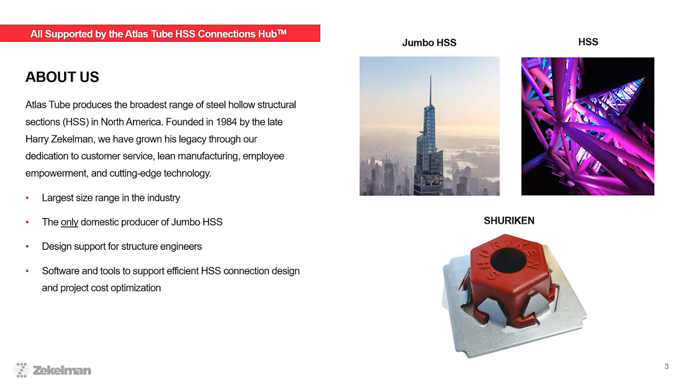We're very proud that we are a domestic manufacturer. All of these jumbo sizes and the other material we provide are all produced here in the US. Or for those joining from Canada, we do have one plant in Canada. So we want to make it easier for people to use this material, and that's what we're going to cover today.

Again, I mentioned we produce the largest HSS. What that works out to is squares up to 22 inches, rectangles up to 34 by 10, and rounds up to 28 inches. And all of those we can do with a 1-inch thick wall. The reason that those particular sizes are selected as the top end of the range is that's the largest you can do under the A500 or A1085 specifications. So basically, if the material can be produced according to that spec, we produce it.

We invest a lot in technology to allow our mills to be flexible, to switch between sizes quickly. That lets us produce each size more frequently, and that means that they're going to be generally more available. We can also do very long lengths. We've done up to 135 feet, which was fun. We had to poke a hole in the side of our building to get those pieces to come off the production line. But if that's something that your project required, that is a capability we have.

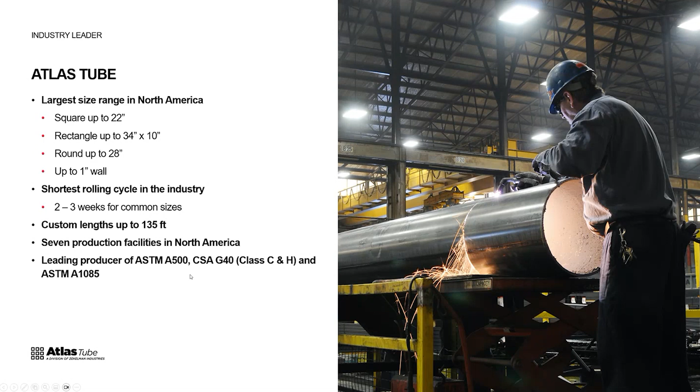One of the things, talking about sizes here and availability, that I do want to highlight, it's one of our most used resources, so I just want to spend a minute here, is our HSS availability charts. So we want to make sure that anytime an engineer is speccing a product, that they have the information that's going to be helpful in terms of making sure that that's available when it comes time to actually do construction.

So if you go into the availability chart, which is on our website, basically it's a color-coded resource that's going to tell you what are the sizes that we're producing most often, which are shown in green here, the sizes we're producing reasonably frequently in yellow, and then the ones that we can produce but are less common, so often require custom order. This is an Atlas Tube specific resource, but we're responding to the same market forces as any other producer of HSS material. So in general, it's a very good guideline for what sizes are easily available versus those where a little more care has to be taken to just ensure that you're going to have that availability when it comes time to actually start construction.

And I did mention the jumbo HSS. So, in the availability chart, basically the jumbo HSS are those sizes there in the bottom right, which are either larger, thicker, or both compared to what's typically available on the market.

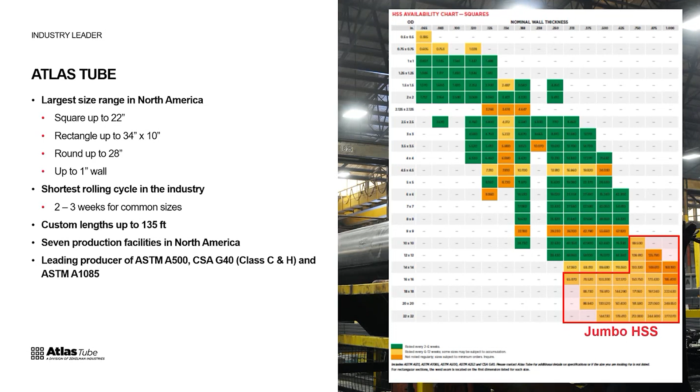The other product, which I mentioned earlier, is the Shuriken. This is actually kind of my baby, so cutting it down to 3 slides was very difficult for me, but if you do find it interesting and would like to have a presentation for your firm on the Shuriken itself, certainly let us know. We're happy to set that up.

And what that means is when you get to the field and it's time to actually bolt things together, you're going to have that nut on the inside letting you install the bolt from one side. So basically the idea is to take some of the more historically difficult connections which have required welding in the field and turn them into bolted connections. And again, there are a number of different calculators within the Connections Hub that make use of the Shuriken to allow for field bolted connections with HSS.

It works for both snug tight applications. In that case, you just need the bolt itself, no washers required by code. Or if you have a pretensioned or slip critical application, you can do that as well. But we do strongly recommend using DTI washers as the method to verify the pretension, since that can be done entirely from the exterior where it's going to be visible.

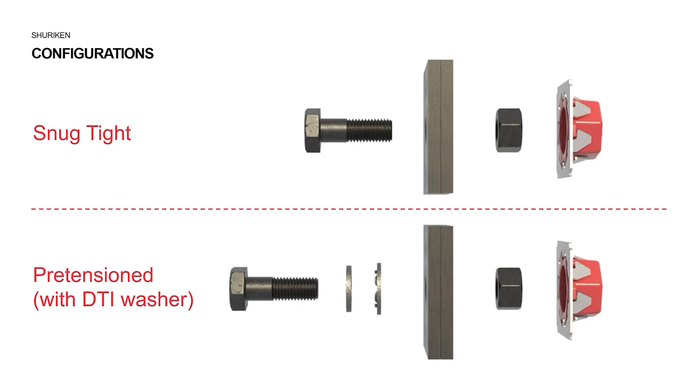So initially we came out with the Shuriken mainly for column splices, but it's come to our attention, thanks to the creativity of the engineering community, really, that there's a lot of other ways that you can use it. So we've gone ahead and put together some resources. These are on our website. I'm not really going to go into any detail today, but just want to make you aware that this resource is out there, in terms of different ways that it can help you simplify your connections, and that really it's just a matter of how creative you want to be with it.

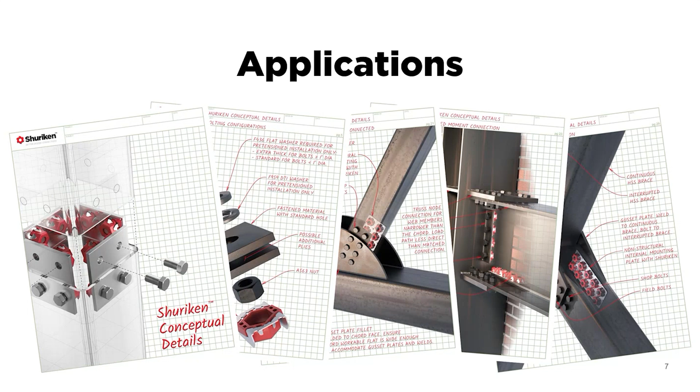So I'll leave that there, and we'll go ahead and get into the real meat of today's presentation, which is about the HSS Connections Hub. So what is it, to start? The Connections Hub is really about supporting engineers, making it easier to do what you have to do for your projects. So that includes a few things. First of all, typical connection details. Essentially, you can use them in the way that you would any other typical detail library your firm might have.

Then there are the calculators. We'll spend quite a bit of the time today talking about those calculators and how to interact with them, how to make the most from the capabilities they offer. And then there's also design and technical support. There are ways to get in touch with us through the hub if you have project-specific questions or calculator-specific questions. We want you to do that. We want to know what are the challenges you're facing and how we can help to make them simpler.

Before I get into the mechanics of the hub specifically, I want to zoom out a little bit and kind of talk about why we started this project in the first place. It's no surprise that we think that HSS is not used as often as it probably deserves to be, given the really great properties when it comes to compression and that sort of thing. For what it's worth, I'm kind of a true believer on this front. I worked on developing Shuriken to make HSS easier to use before joining Atlas. So even before I was an Atlas employee, I really thought that HSS was a product that people should be using more of. And so the question is, why is it so comparatively rare, compared to wide flange, in the engineering and construction world?

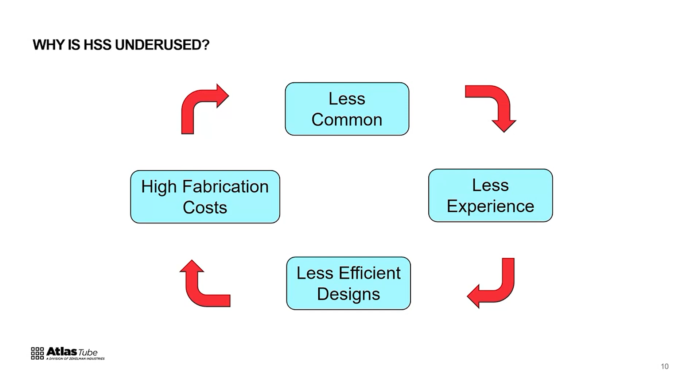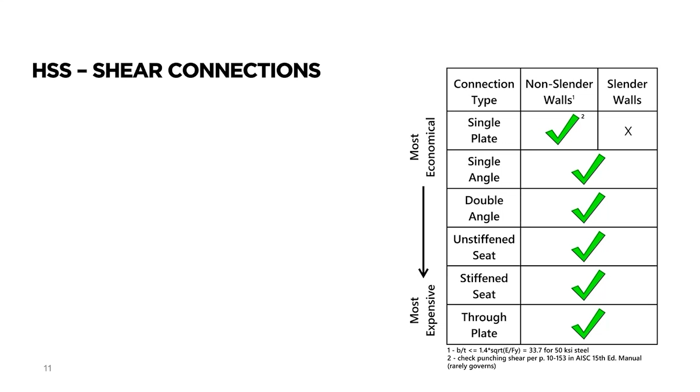Quick example of that. This is a slide that I've taken from some of the other presentations I've done talking about shear connections to HSS. So often, if we go to an engineering firm and look at the typical details, it's very common to see the through plate as the typical beam to HSS column connection. And the reason for that is, I think in a lot of cases, people are just not aware that really you can generally use all of the other easier to produce connection types.

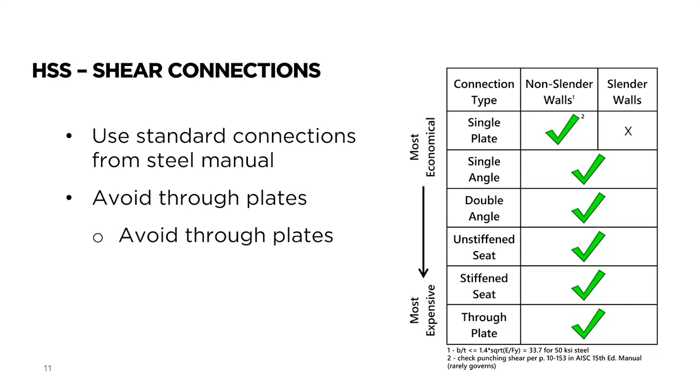So on the right, starting at the single plate at the top, which is the most economical connection, single angle, double angle, seats. These are all options, and generally speaking, you can pull them through from the AISC manual. What we really want to tell people is avoid through plates. They are hard to produce, and that contributes again to that tendency for fabrication costs to be higher with HSS than wide flange in some cases. So again, really trying to get that message across, but this is just one example.

One of the important things I think we need to mention is it's designed by engineers. We're working with a company called ClearCalcs, who specialize in structural calculators for engineers. And so this is engineers designing calculators, not software companies trying to figure out engineering, right? So it has that background. The idea, again, we want to save time, of course. We want to optimize, help you make your connections more efficient, and make it really easy to do it. So there are tools to be able to share calculations within a project team, and just in general, streamline the process that an engineer has when doing this kind of connection.

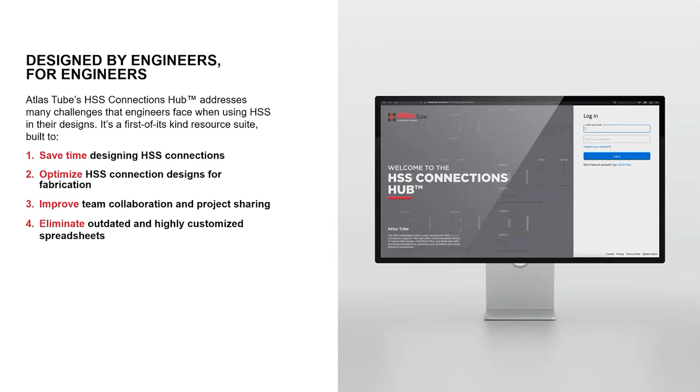Starting to drill down what's included in the HSS Connections Hub, I'm going to take kind of the simpler thing first, which is the typical connection details. So often in engineering firms, and certainly this was true of the firms that I worked at before coming to Atlas, which were excellent places to work with a lot of great engineers, I think it's a pretty common situation that typical detail libraries don't get quite the attention that they often deserve. They're used very frequently, but when you have project deadlines, going through your typical detail library and reviewing things to see what's really necessary, what's overly specific, what maybe has changed with recent codes, it just tends not to be a high priority.

And the result is that a lot of firms have detail libraries that are either outdated or often contain details that were really kind of specific to a project and were copied in, and you'll often have quite specific requirements which maybe don't really belong on a typical detail.

And so our goal here is to really create a set that lots of engineering firms can use and be confident that what they're showing on those typical details is going to be kind of fabricator friendly, efficient from a load transfer standpoint, and that it's up to date with the latest codes and standards.

These are all available in PDF, CAD, and Revit formats. You can get the full sheet in PDF, or in all the formats you can get single details. And the idea there is just if you want to get it onto your drawings, you should be able to copy and paste and just make a few little tweaks to make it specific to your project. But we want to make the process as seamless as possible.

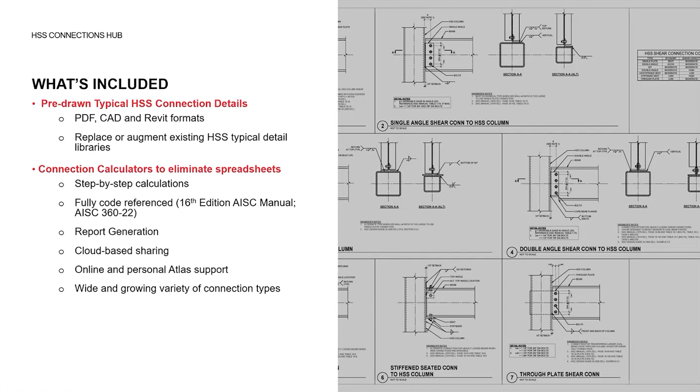With that, let's look at the typical details in just a little bit more detail here, no pun intended. So we do have the downloadable files. Right now you're seeing the first 3 sheets. At the moment there are 4 full sheets of typical details, all focused on beam to column connections.

These, along with the calculators, are set to grow dramatically in the next few months. We'll probably hit 8 to 10 sheets once it's done. And the goal is to not only cover the beam connections, but also braces, base plates, splices, truss connections, etc. So really trying to make it a thorough resource for really any of the common connection types that you see when working with HSS.

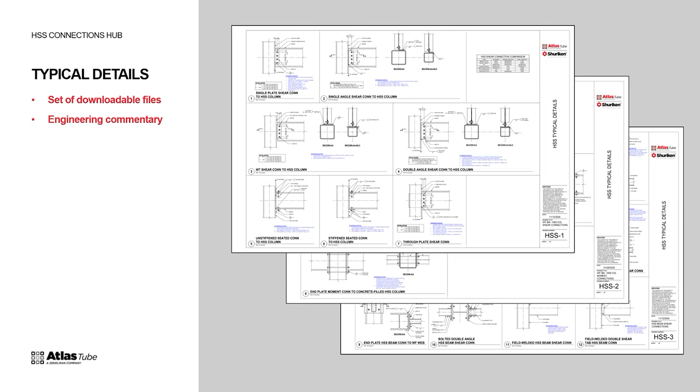I'm going to go ahead and pull up now just one specific detail, rather than the whole sheet, just to see things a little more closely. And again, this is available in CAD and Revit format. So if you do decide that this is the way you want to go, you could just download that CAD file or that Revit file and drop it straight into your drawings.

But one of the other points I want to highlight is that, again, the HSS Connections Hub is there to be a tool that's going to help you produce designs and get through projects. But it also is there to be an educational tool. So with all of these details, we have engineering notes shown here in blue, which are basically going to give you some guidance. When is this an appropriate connection to use?

So in this case, this is the most economical HSS column shear connection. And then perhaps some limitations. You can see note number 2 there, situations where maybe it's not applicable. We've also got references where you're going to be able to find information on these connections in the manual or in the spec. And then for the connections where they exist publicly, it'll also point you towards some design examples.

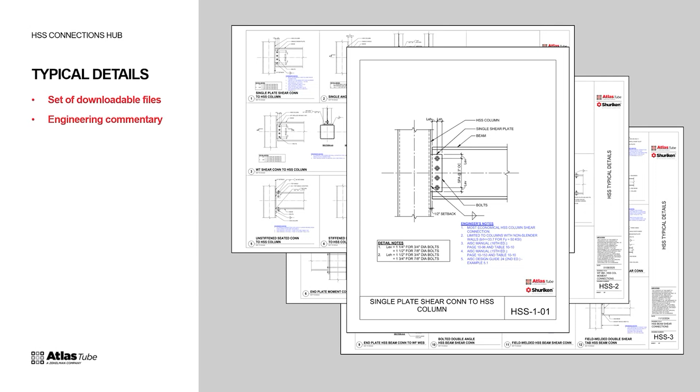Again, you've got the reporting feature, so once you have everything done and your utilizations are where you want them to be, you can go ahead and produce a report to convey that information to whoever needs to see it. And right now, similar to the details, we've got 20 connections on there, of which 18 of them are beam to column connections.

And so primarily what we have now is shear connections and moment connections, and we have them both for wide flange beams connecting to HSS columns, which is very common because column application is really where HSS shine the most. There are certainly other applications, but that closed balanced shape works excellent in compression, so that's where we kind of started. And then there are also connections currently that do HSS beams to either HSS or wide flange columns.

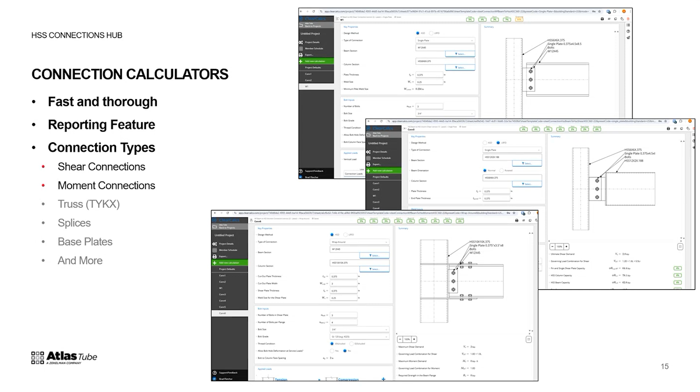So with that, I'm going to start to really get into the meat of the interface and how we interact with these calculations. Everyone who's here today got the invite because they have created a username for the hub. Whether you just created the username and maybe played around with a connection or two, or you've been using it for actual work on projects, hopefully it doesn't hurt to have a run through of all these features, and you come away with a little extra knowledge to use the tools to the best of their potential.

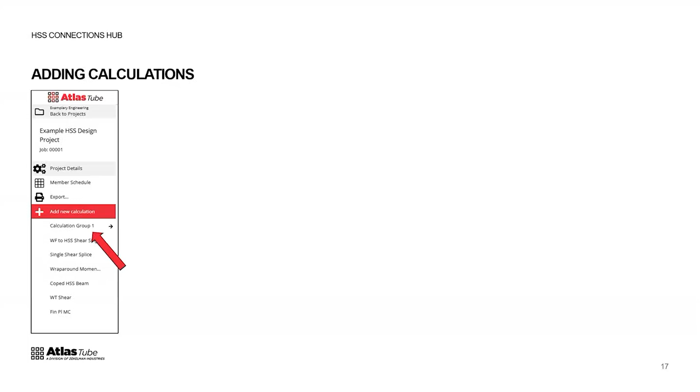So once you've got your project set up, we get to this screen where we can actually start putting in our calculations. I have a few calculators already there towards the bottom, but of course we have, in red, the button Add New Calculation. That's pretty straightforward. Before we look at that, one thing to highlight is that you can also group calculations. So if you wanted to group all your beam connections together or all your splices, or by their location in the building, whatever way is most straightforward to you to organize them. That's a helpful option if you have a large project with a lot of connections.

So when we hit Add New Calculation, it's going to bring up this screen for us to choose the connection type. I mentioned we had 20 calculators, but we only see 6 buttons here. So basically several of those calculators are grouped based on the general concept.

So what are we connecting and what are we connecting it to? If we click wide flange to HSS shear connection, all of these are wide flange beams connecting to an HSS column. It's just how we're going about doing it.

Before we jump into one of these connections, I do want to highlight that the goal here, of course, is a tool to produce calculations, but we also wanted to have an educational or informative aspect to it.

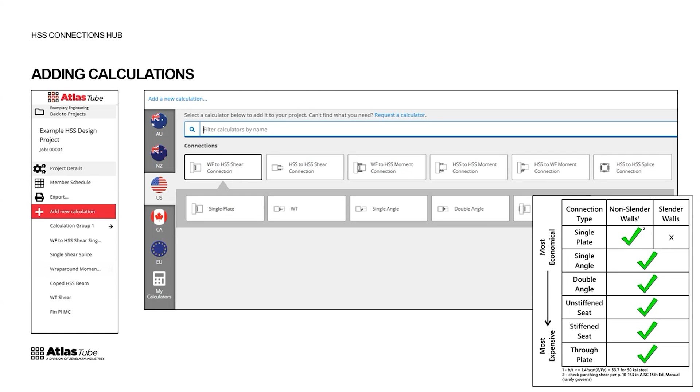If we look back at that graphic I had shown earlier with the different types of shear connections and gradient of economy there, you're going to see a similar pattern here. Single plate is the simplest, all the way at the left with those options, and then gradually moving through to the through plate at the right, which certainly is an option. It has its time and place.

We want to avoid using it unless it's really required based on the forces we have. So in this case, we're going to go ahead and do a single plate calculation just because that's reasonably simple. There aren't too many limit states, so the screen is not going to get too crazy as we go through this.

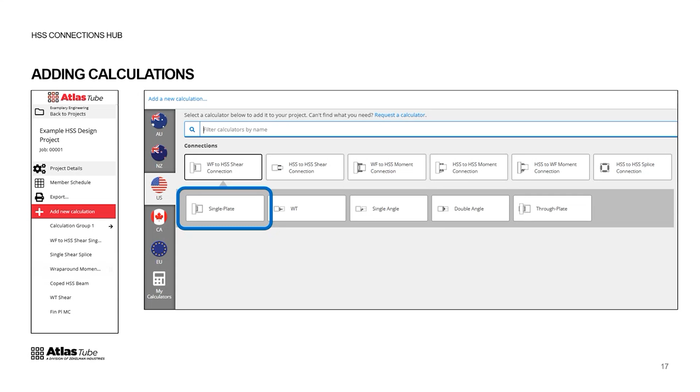But the processes, the things I'm going to highlight, would be the same regardless of the connection type. When you go ahead and select the type of connection you want to do, this little screen will pop up on the right side of your screen.

A few things here to point out. Of course, you can change the name of the calculation, whatever it needs to be. Another thing is when it comes to viewing the actual content, there are two views here, a standard view and a detailed view. The standard view is going to show the most important information, but it's going to take out some of the things that are unlikely that you'll need to look at over the course of the calculation.

So for example, if you're in the standard view, it may not show every single number about the column's cross-sectional properties. Detailed view shows every single number that gets used in the calculation. Personally, I tend to prefer the detailed view. I don't really mind having more stuff on the screen, but it is an option that's there.

And if you're ever finding yourself wondering where a particular piece of information is, you may want to just check that you are in fact on the detailed view. If you're on the standard, it's possible that it's just been edited out for brevity.

The other thing you'll see here is for every calculation, it's going to show us the reference. Currently, all of the calculations on the site are referenced to AISC 360, but we do, as part of our plans to build this out, expect to have calculations conforming to the Canadian code in the next few months as well. So something to keep an eye out for those of you working in Canada.

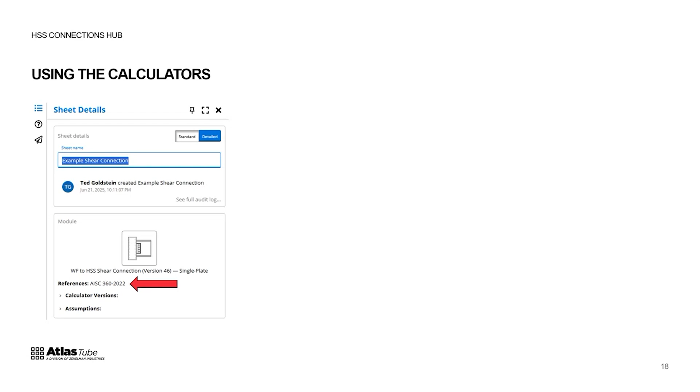So once you get that all resolved and you close that little window, you'll be looking at the main calculation interface here. Again, I'm just going to go through and point out some things to be aware of.

Right away at the top, we have all of our limit states, and on the very right, whichever one of those limit states is governing. Currently, there's one kip of live and one kip of dead load here, so all these numbers are very low in terms of utilization, but we'll see how that changes in a moment.

All of those limit states are then repeated down in the bottom right, and you can see that all of those have little drop downs that you can click on to get a little more information about where those limit states come from. Even that is kind of a summary, and we'll see where you can find the nitty-gritty information as we progress.

Some other things to highlight: first of all, on the top left, these are really the key properties, because these are the most important pieces of information that you're going to have to input. Before we get into anything specific, one thing I really want to highlight is if you look up here, the second line is type of connection.

So when we started that connection, we had that menu of different shear connections we could make: a single plate, a single angle, a double angle. That's changeable within the calculation.

That's nice, because if you put in all your information, your member sizes, your loads, and start to manipulate the configuration, if you can't quite get it to work as a single plate, whether because the load is too high or because you have a column with a slender wall, you can use that dropdown to change to a different connection type, but you'll retain the information you've already entered. You won't have to give up and start again from scratch. All of that is still usable, just another way to try to streamline the process here.

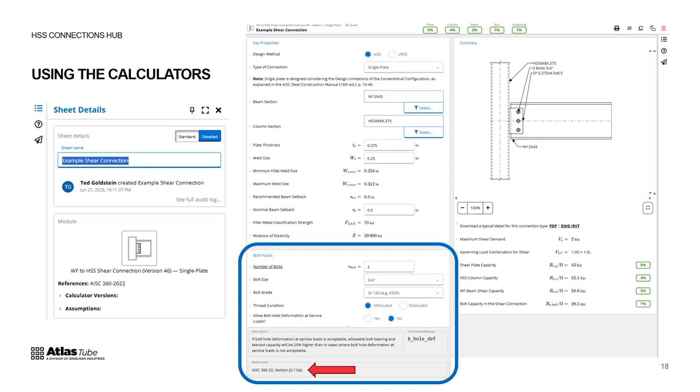But then crucially, we also have, for every single line, an AISC code reference, well, AISC in this case. Again, it will be Canadian in some cases in the future, but a code reference so that if you want more information, more background, where you really want to dig into it, for any reason, you know exactly where to turn in the manual to get that information.

Above that, you have the loads, and of course we can enter some new loads. So if you go to that edit button where it shows the load magnitude, in this case, since we're doing a shear connection, it's just a vertical load. If you were doing a moment connection, you would have a space for shear and also for the moment.

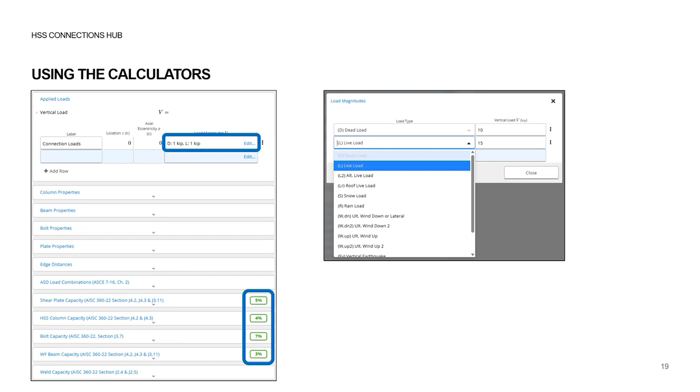One piece of feedback we've already received, which we are working on, is getting axial load into these beam calculators. That's not quite there yet, but it will be a feature coming in the future. Once you enter these loads, you'll see the original loads and utilizations, and as soon as you enter those, all the utilizations change. You don't have to run it in some way, it's all live.

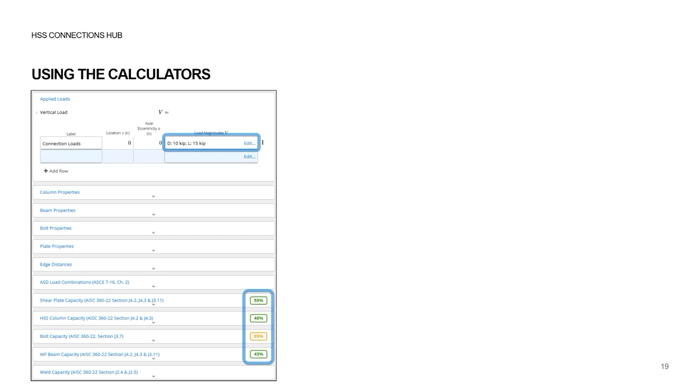Now again, we've got a lot of lines here. Some of them just say properties, generally giving you information on what the various parameters are. Below that, we have a pretty large section of different checks being run - those are the bottom six categories, the load combinations and all the various limit states. Again, those are all going to have code references on them.

If you want to see, for example, where that 48% is coming from on the column, you can drop that down and it'll break down the various checks being run. In this case, we've got two: one is an actual demand capacity check giving you that percentage, and there's also a slenderness check to make sure the column meets the requirements for this type of connection. If we look at the bolt capacity dropdown, that would probably have three or four different limit states - bolt shear, slip if relevant to your connection, etc.

Again, in keeping with the idea that everything is transparent and we don't want any black boxes, we want to make sure you know exactly where to get more information. If there's something you're not familiar with - say, punching shear of an HSS column - you can just click on it and get that description: what is it, where can I find information about it, what's the equation, etc. We're trying to make it as transparent as possible so there's nothing ambiguous about where the numbers are coming from. That's true of both the calculators themselves and the reports generated subsequently - there's the equation and the reference.

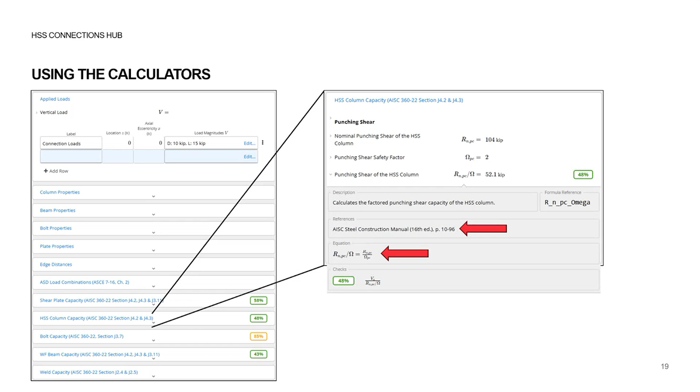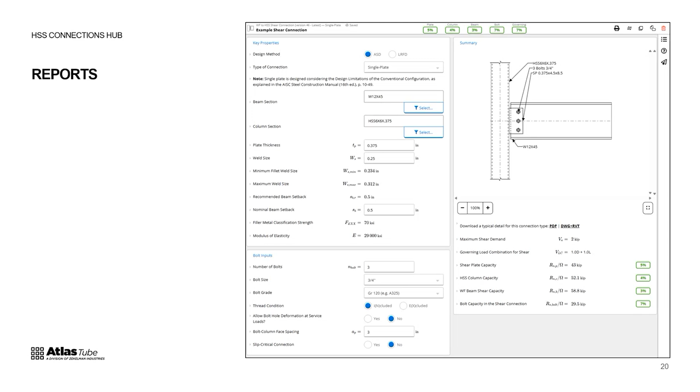So once you've done the connection and gotten it to adequate capacity for your application, you're ready to document it for submission to whoever needs to review it. You can go up to the top right, hit that printer button, which generates reports. When you hit that, you'll get this interface pop up.

One thing I want to note: currently there are two checkboxes for member schedule and project defaults. In general I'd suggest leaving those unchecked - they're associated with the base platform, not really applicable to specific connection calculations, and those checkboxes will probably go away in the future. For now it's not a problem if you check them, but some irrelevant information would go in there, so I'd leave those out.

When you go to the print mode, we have a few different versions of the report, basically just how much depth you want to go into - a one-page summary, self-explanatory; standard, which shows the highlights; and detailed, which shows every single number. Naturally, if you choose a more abbreviated version, the reviewer will probably ask where the other information is, and if you choose the detailed one, they'll complain the report is too long. But alas, we don't quite have a solution for that.

So once you're ready, you've got everything set and chosen your connection - and as you can see, you can do a whole group of connections at once if you'd like. You can hit the export button and that'll produce the PDF. There's an Excel format as well - it's not going to be a line-by-line run through of a specific calculation, but if you want to see all the calculations with the demand capacity ratios, you can do that in Excel too.

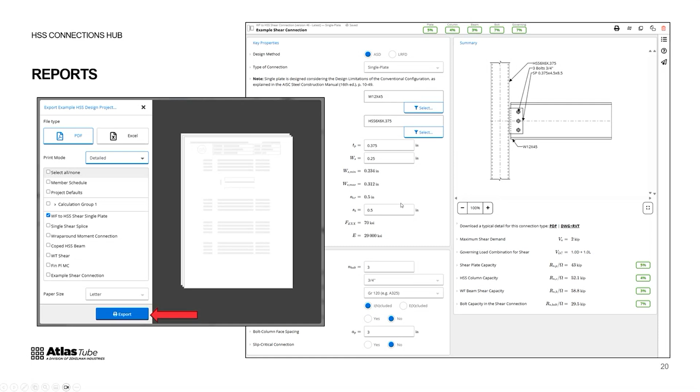So once you press that export button, this is what the report is going to look like. Of course, your firm's logo will be up here instead of mine, but it includes all the basic information you'd expect. You've got a sketch of the connection. Again, this is going to be a live representative sketch. It's not just conceptual, so it'll be all to scale to let you see that it looks properly proportioned. And then you have, of course, your loads, your governing load case, and the overall capacity ratios. I should have put these highlights on there.

One other thing to note is you do have, again, the button here for the typical details. That is a hyperlink within the PDF, so you can access those typical details that way as well. Again, just trying to make them as easy to get to as possible. And all the information there, the general stuff at the bottom.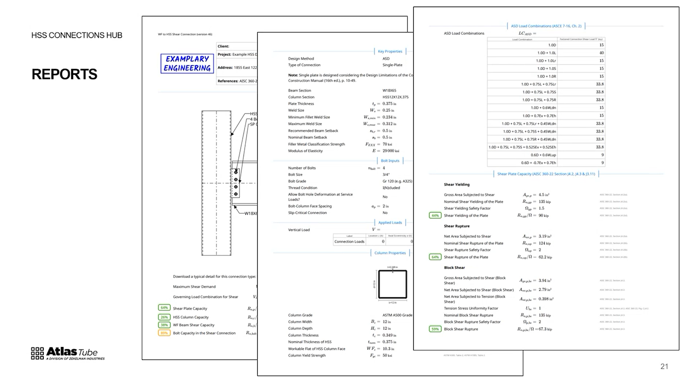So that's really the interface. It's not really groundbreaking in the sense of how you go about inputting the information and getting the answer, but it is a big deal for HSS design because, of course, the existing software out there doesn't really cover that topic in nearly the depth that wide flange is generally covered, just because it's currently less common to use. So we think this is going to make a really dramatic difference in how engineers interact with HSS and are able to use it.

So if there's a connection that you think would be useful, but you don't see it, please use that little paper airplane button. Send us a message. Tell us what you want to see. We absolutely do adjust our development pipeline based on the feedback we get. But know that it is growing quickly, and that there's a good chance that if something's not here now, you will see it in the near future.

So with that, we still have a decent amount of time, but I'm hoping to have some questions.

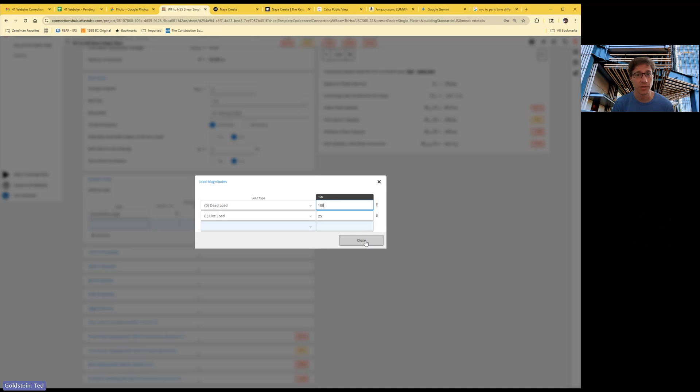So for example, if the factored load you get from the engineer of record is 120 kips, you can just go ahead and enter 100 kips of dead load, and then of course, once the program factors it, the result will be 120 kips. Now in this case, of course, that's making everything fail because that would be an awful lot of load to put on this connection, but that would be the method that I would suggest using if you find yourself in that situation. And as I say, eventually that feature will come into the program.

Okay, so the next question, let me go back and put this to a reasonable load number here, so we're not looking at a bunch of red. Can you run through a brace connection? So the brace connections are in the group of things that are currently under development, and that list that we had towards the end of the presentation there are, I believe, a couple brace connections. So I would expect to see them in the next couple months, the vast majority of which are beam connections.

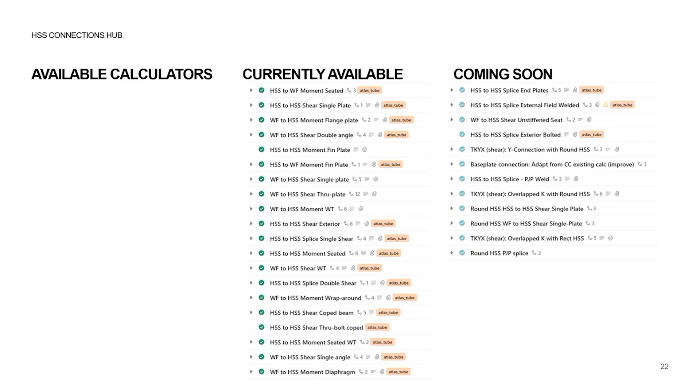If we do this webinar again at a later date, we can run through a brace connection, but that is not quite available yet. So the next question is, are there any calculations or details using hollow bolts? So again, not currently. Right now, all of the connections that we have that do require fastening from one side are done using Shuriken. That uses standard A325 and A490 bolts, which makes it a little bit easier from a calculator standpoint because we're pulling the numbers directly from the steel specification.

With various proprietary fasteners such as Hollo-Bolt or blind bolt, in those cases you would need to pull the fastener capacities from the manufacturer's table. So we are looking at that. We're not completely decided on whether it will be added as a feature, just because if the model of Hollo-Bolt or any of these products were to change and the load were to change, we would need to make sure that we have a way of capturing that in the program to make sure we have the most updated values.

With all that said, in general, for most of these calculations, you can still run the numbers for the calculation as a whole using the Connections Hub, and then at that point you would just want to pull out the bolt forces from the results and just check those against the load tables for those particular fasteners. Another thing that it could affect that you just want to be aware of is if you've got a connection that's governed by either net section rupture or block shear, then having a wider hole, as some of those other proprietary one-sided fasteners do, could affect the net section rupture or block shear capacity.

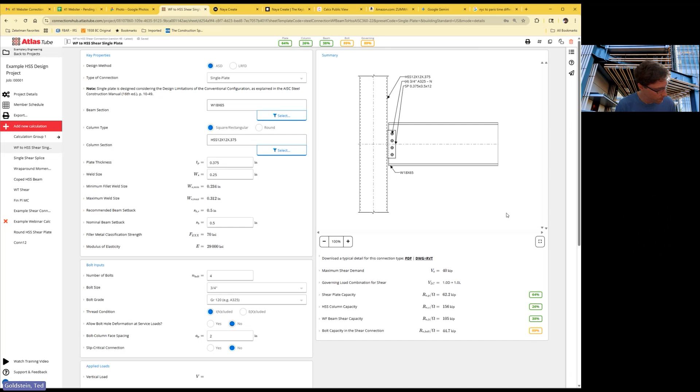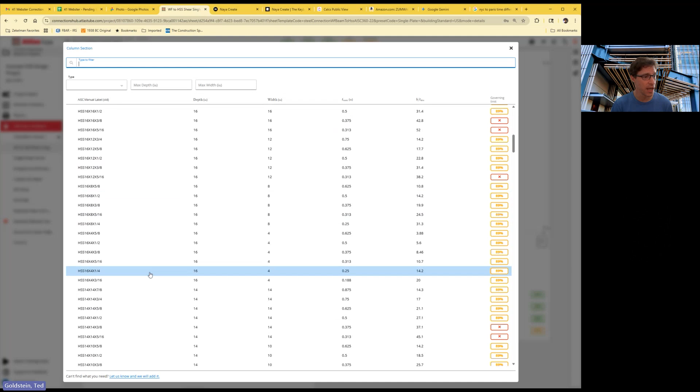Okay, next question. How do you control the member orientation? So this comes up in a few cases. In this case, of course, we have an HSS column and a wide flange beam. So when the column is what you're looking at, you can go ahead and change the size here from square to some kind of rectangle, so let's choose maybe a 16 by 8 by 3/8. At that point, once you've changed the size, an option for which face you're connecting to comes up. And so right now we're connecting to the short face.

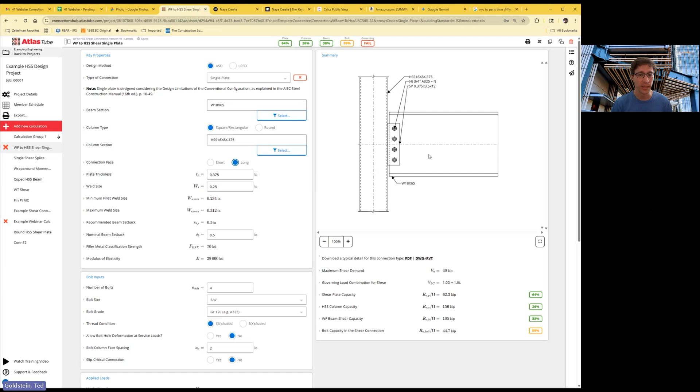So in other words, well, there's no moment here. If this were a moment connection, we'd be bending on the strong axis. If we switch to the long face, you can see the diagram changes, the scale changed slightly, but you can tell now that the beam depth, which hasn't changed, is much larger compared to the column, and that's because we've flipped the column orientation.

So the next question is, does the HSS Connections Hub check all of the limit states associated with the AISC code? And the answer there is yes. We've built this so that this is a complete calculator that's going to make all the checks that are required for any particular connection type. Now, of course, that doesn't mean that the engineer's judgment is not still an important part of the process, but there are no additional checks that need to be run after the fact to determine whether you've got an adequate connection.

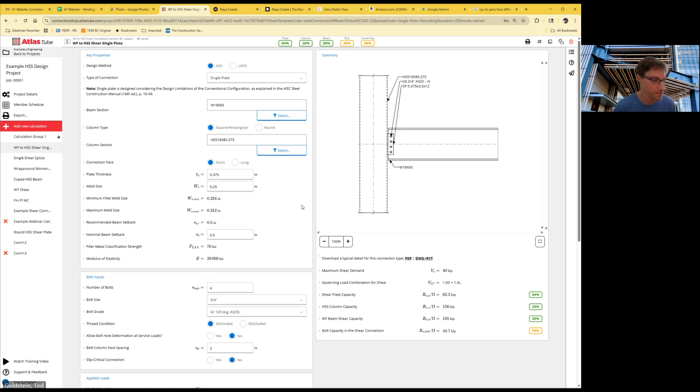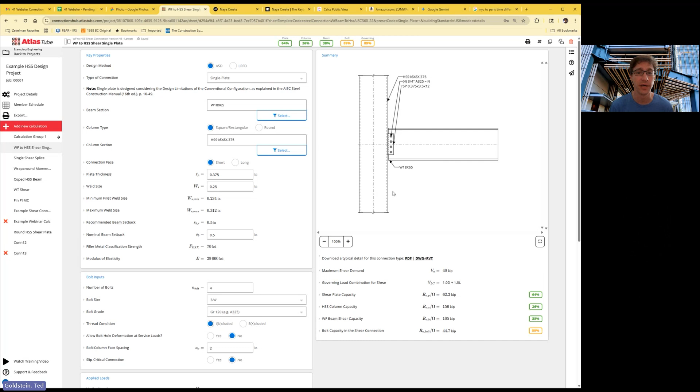While these calculators do include all of the strength checks required by AISC 360, it is worth noting that depending on the characteristics of a given connection, there may be different stiffnesses. Those requirements are not very well defined in the AISC code, but they do have requirements for rigid versus partially rigid connections. And that is certainly something that an engineer needs to be aware of and use their judgment as appropriate.

Okay, next question here. Will we be able to do a cap plate, moment plate, and bottom plate? And the answer there is yes. We will be adding a connection where the beam, generally a wide flange beam, runs over the top of a column that has a cap plate. And that is relatively close on our development pipeline. So I would expect to see that calculation in the next few months because we know that is a relatively common condition.

So the next question is, does your software address connections to round HSS? That is in the development pipeline. We actually have a few calculators that are completed and just undergoing QA that will allow you to select round columns. So we're going to start off mostly dealing with the shear connections, for example, wide flange beam to a round HSS column. But we will also address moment connections. For example, if you have a moment connection to a round HSS column, a wraparound plate is a good solution in that case, and we're going to be adding that function as well.

Also worth noting that we'll be including a complete selection of T, Y, K, and X connections. Basically the connections in chapter K of the specification, and those will all be available using round members. So if you're doing a truss made up of round HSS, we'll be able to calculate the capacities of the connections in that truss.

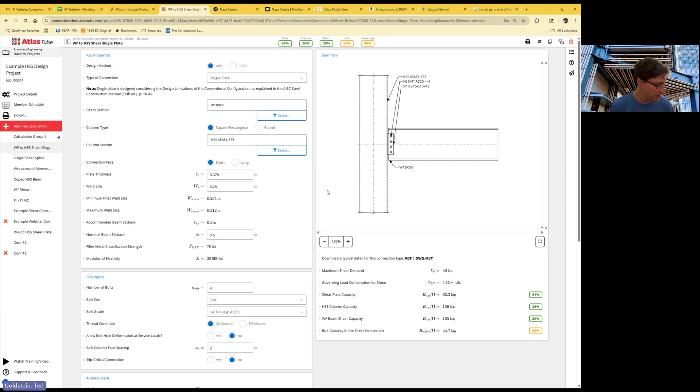The next question, pretty simple. Is there an option to choose between LRFD and ASD? And the answer is yes. It's actually right up at the top here before you even get to selecting the connection type. So it's kind of away from the member selections and the other properties. So easy to miss potentially, but yes, right at the top.

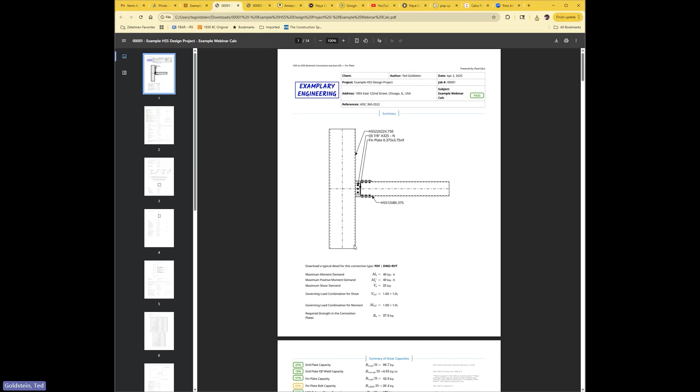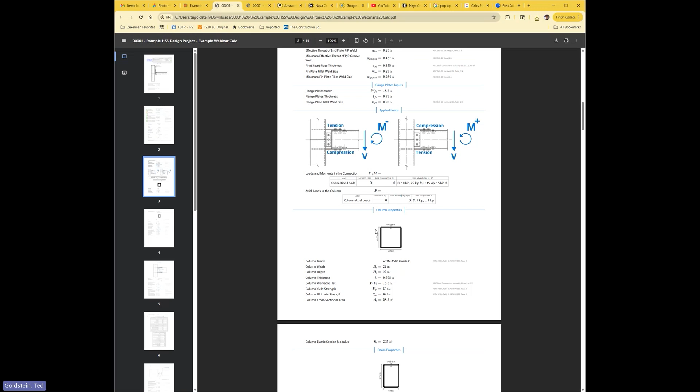How extensive is the calculation printout? I think we did kind of cover that. If there's maybe a more specific item where you're wondering if it's included, we can look at that. But suffice to say, if you're choosing the detail calculation setting, it's going to include every single number that goes into the calculation.

So that kind of wraps up the questions that we got on this webinar. But as you use the program, of course, we understand that more questions will probably come up.